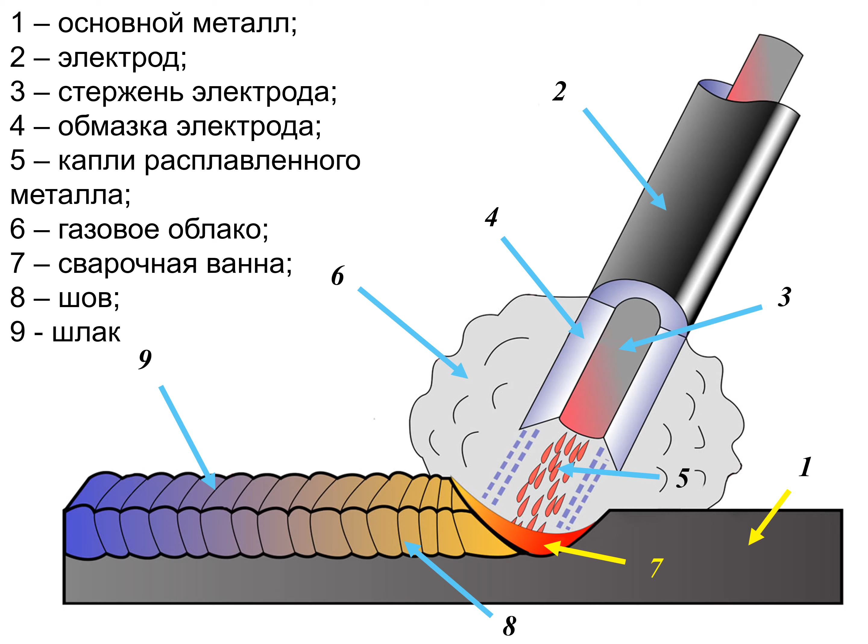What is stick welding? Stick welding is an electric arc welding process that uses rod-shaped metal electrodes covered with a flux material. The American Welding Society calls this process shielded metal arc welding, or SMAW. You may also hear it called manual metal arc welding, or MMA welding. Some people refer to it simply as arc welding, but shielded metal arc welding, or stick welding, is just one of many types of arc welding.

In stick welding, an electric current flows through a metal electrode or stick. An arc forms between the end of this electrode and the workpiece. The arc melts both the metal in the rod and the metal in the pieces to be joined. The metal from the electrode is ejected into a molten weld pool and mixes, or coalesces, with the workpiece. The metal in the workpiece is called the base metal, and the metal added to the joint from the electrode is called filler metal.

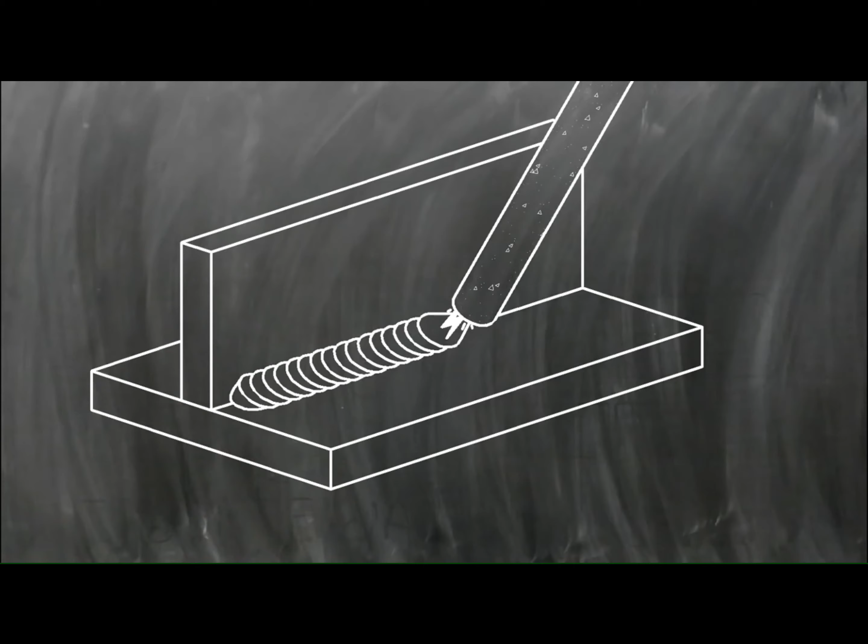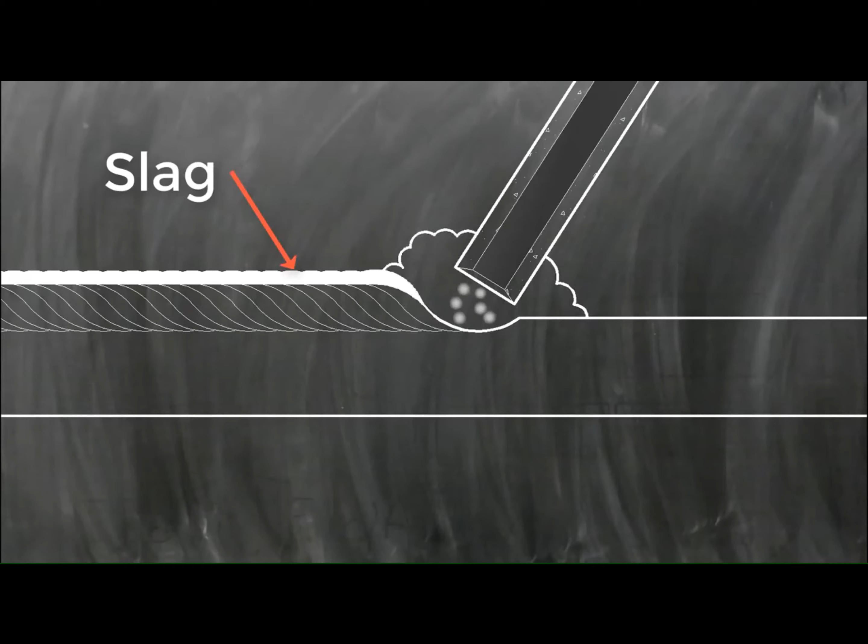Stick welding always adds filler metal to the joint. Because the electrode is constantly melting away and becoming part of the welded structure, stick welding is known as a consumable electrode process. As the electrode is heated by the arc, some of the covering releases protective gases that shield the weld and help stabilize the arc. The remaining covering melts and covers the molten weld pool with a protective slag layer. This slag layer protects and helps shape the weld as it solidifies, but it must be removed when the weld is cool.

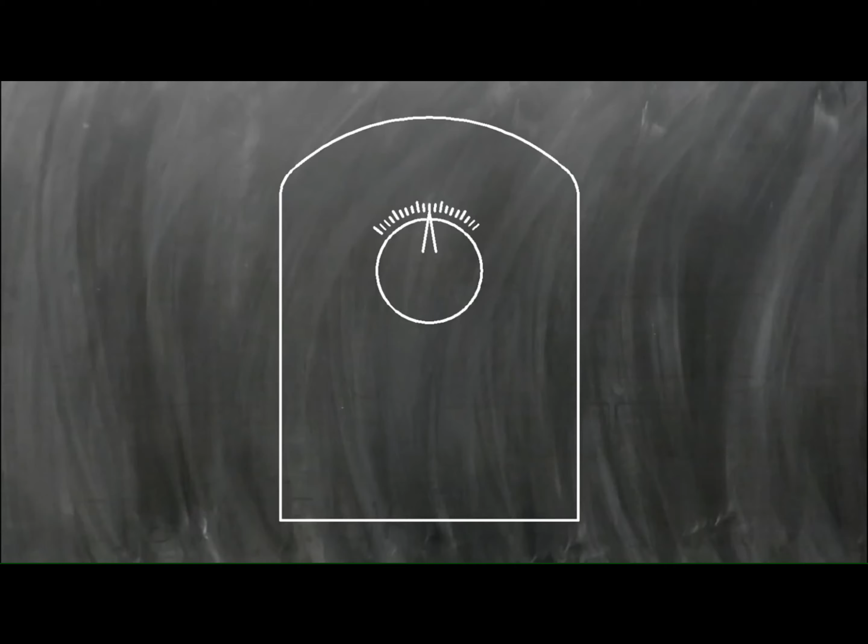Since the gases generated by the flux covering are able to completely protect the molten weld, there is no need for other shielding equipment such as high-pressure gas cylinders, regulators, or hoses. Compared to other welding processes, stick welding equipment is often very simple. Sometimes the only controls on the machine are current and polarity. Many important welding variables come from how the person doing the welding positions and moves the electrode. For this reason, the quality of welds produced by this process depends greatly on operator skill.

In stick welding, two insulated wires are connected to the welding machine. One lead goes to a clamp which is connected to the work. This is called the work lead. The other wire goes to an electrode holder. The uncovered, or grip, end of the electrode is placed into the electrode holder.

The polarity of the welding setup refers to how the electricity flows from the machine to the workpiece and back. The current will either be AC or DC. In AC, or alternating current, the direction of the flow of electricity changes directions many times every second. Direct current, or DC, is like the flow of electricity from a car battery. One lead is always positive and the other is always negative.

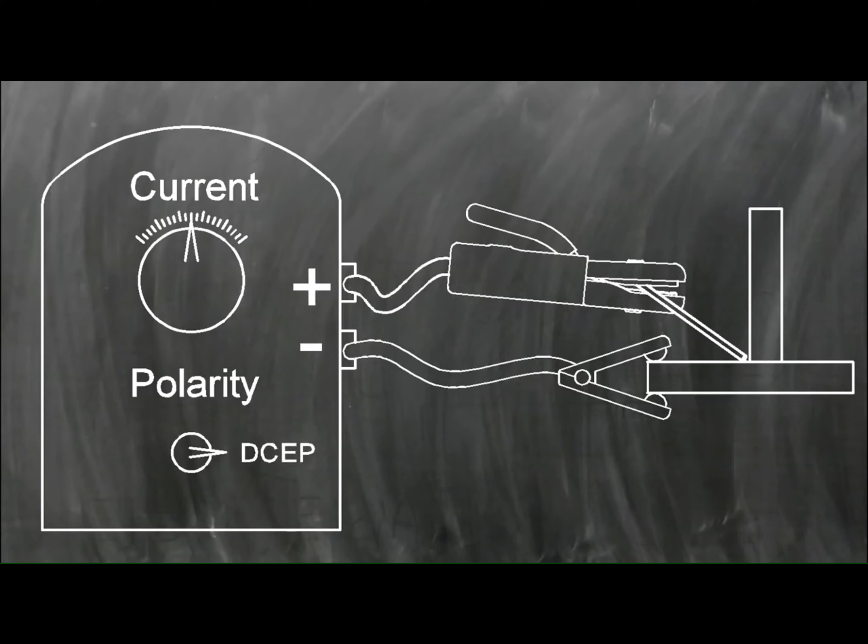DC can be set up two ways in stick welding. One way to connect DC is DCEN, or DC electrode negative, which is often called straight polarity. In DCEN, the electrode is connected to the negative terminal and the work is connected to the positive. The other way to connect DC is DCEP, which is DC electrode positive, often called reverse polarity. Many stick welding electrodes operate on DCEP, but some are designed to work with DCEN or AC, so check the manufacturer's recommendations for the proper settings.

Stick electrodes are made with a variety of metal alloy compositions and flux chemistries. You'll want to make sure the electrode you plan to use will be strong enough and that it's compatible with the base metal and the position of the joint you want to weld. Often, electrodes have the American Welding Society classification code printed on them. This code will identify tensile strength, the flux covering type, the appropriate welding positions, and sometimes other important information.

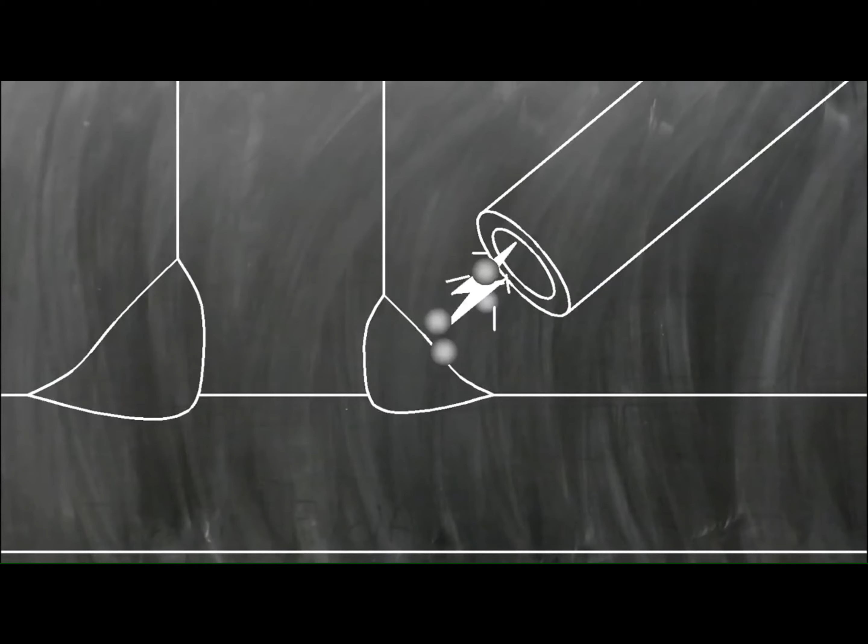So, in summary, stick welding is an electric arc welding process. It uses a consumable electrode rod that is covered with a flux material. When heated, the flux releases shielding gases that protect the weld. A layer of slag covers the weld while it solidifies and is removed when the metal cools. Stick electrodes are not all the same and must be chosen for the specific job they need to do.

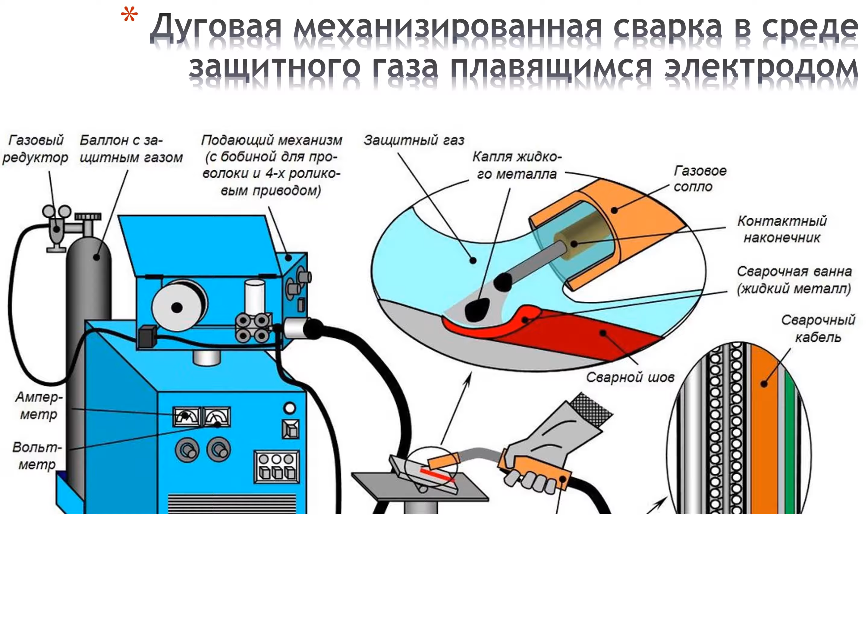What is MIG welding? MIG stands for Metal Inert Gas Welding. The American Welding Society calls this process gas metal arc welding, or GMAW. You might also hear it called wire welding. In MIG welding, a thin wire acts as the electrode. This wire is fed from a spool mounted on a gun or inside the welding machine through a flexible tube and out of the nozzle on the welding gun or torch.

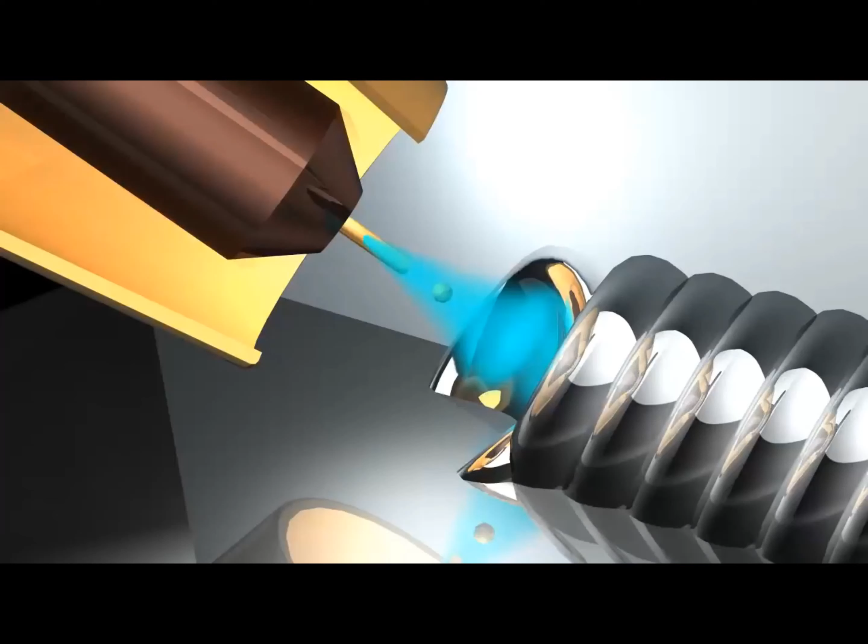The wire is fed continuously when the trigger on the welding gun is pulled. When this trigger is pulled, it also switches on the welding current and a shielding gas. An electric arc forms between this wire electrode and the workpiece and heats both metals above their melting point. These metals mix together, or coalesce, and solidify to join the workpieces into a single piece.

The metal in these parts to be joined is called the base metal, and the metal that comes from the melting wire electrode is called filler metal. MIG welding always adds filler metal to the joint. Because the wire electrode melts as it's being used, MIG is called a consumable electrode process.

Here's the MIG wire going through the wire feeder into a flexible tube or conduit liner. The liner goes through the hose or welding lead all the way to the torch nozzle. At the nozzle, the wire is fed through a contact tip and comes out at the point of the weld.

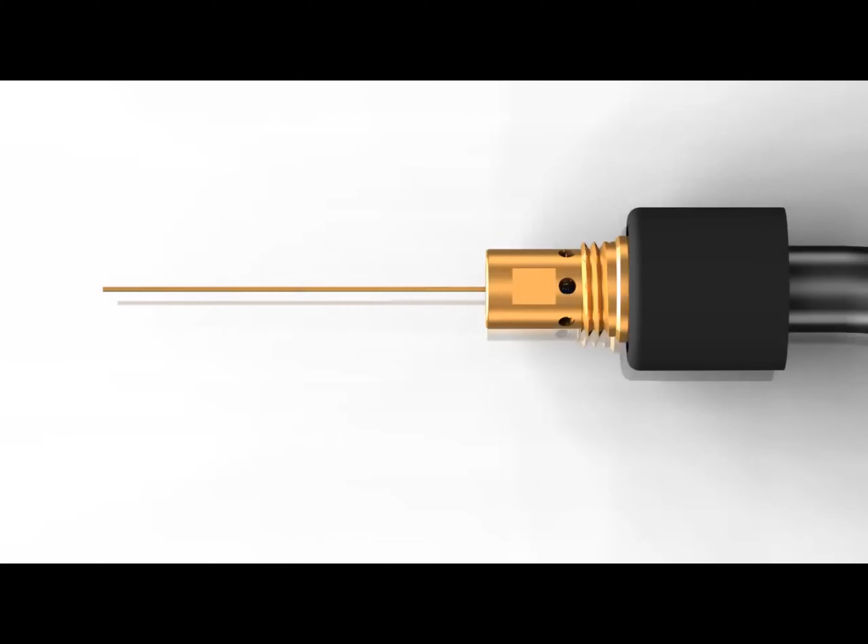Shielding gas is also fed through the welding lead. It goes through a gas diffuser and flows out of the nozzle. This shielding gas, which is often a mix of argon and CO2, protects the molten metal from reacting with oxygen, water vapor, and other things in the atmosphere.

The shielding gas is stored in high-pressure cylinders like these. The pressure is reduced to a usable level by a device called a regulator.

In MIG welding, all the machine controls are set on the machine itself. The most important of these are polarity, wire speed, and voltage. The trigger on the gun is just an on-off switch.

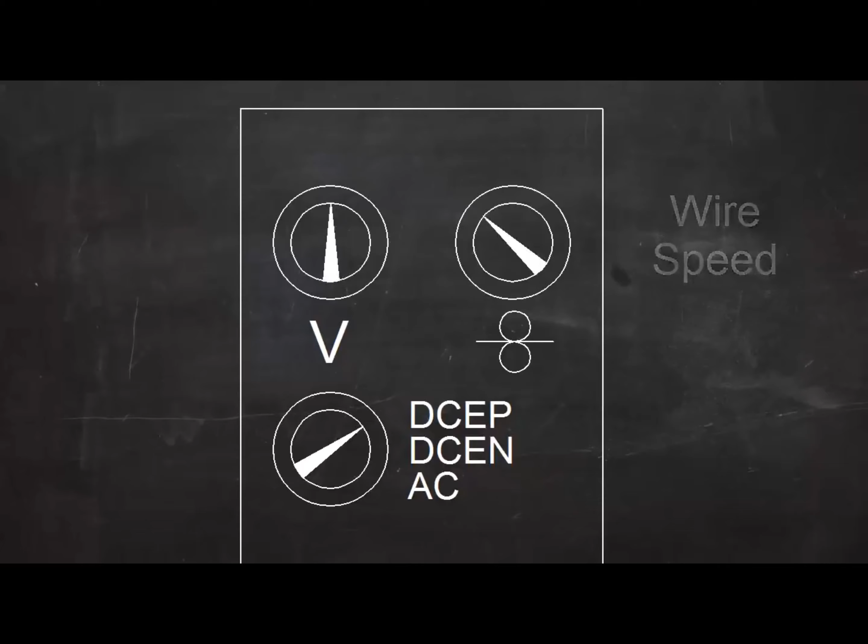For most MIG welding, the current is direct current, or DC. DC is like the current flowing from a car battery. One wire is always negative, and one is always positive. In DC MIG welding, the electrode is usually positive and the workpiece is negative. The term DCEP is used, indicating that the current is direct current and the electrode is positive. This is also called reverse polarity, but DCEP is a more descriptive term.

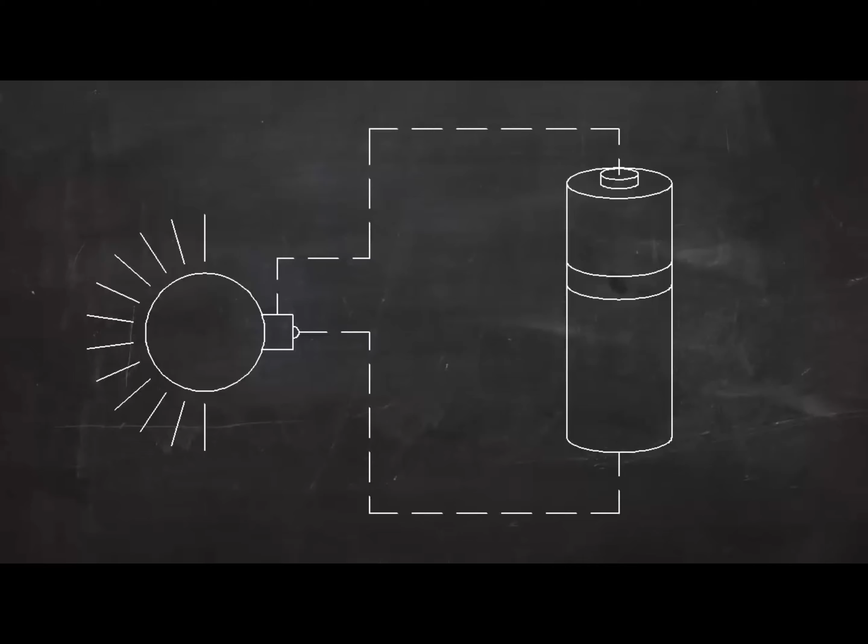In an electric circuit, the current flows in a loop. In MIG welding, the current has to flow in a complete circle from the machine to the torch, into the work, and back to the machine. A work lead is clamped to the work to complete the circuit from the workpiece back to the machine.

So, in summary, MIG welding is an electric arc welding process. It uses a consumable wire electrode. Filler metal is added automatically, and the shielding gas comes from a high-pressure cylinder.

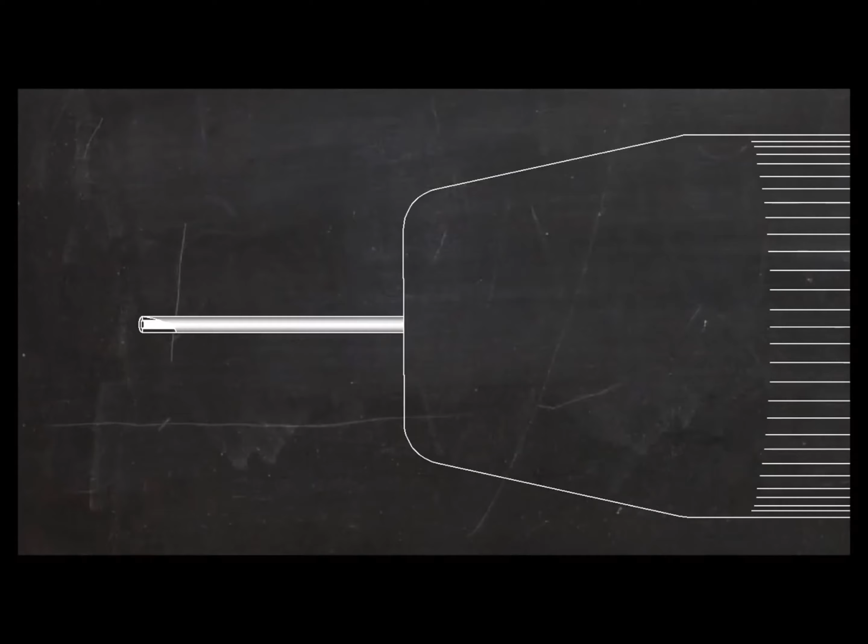What is flux core welding? Flux core is an arc welding process that uses a tubular wire electrode with a flux-filled inner core. The American Welding Society calls this process flux cored arc welding, or FCAW.

All flux core welding is done on equipment that is similar to, and sometimes identical to, the equipment used in MIG, or gas metal arc welding. If you're not familiar with MIG welding, you might want to watch our What is MIG Welding video before continuing. But you should understand that flux core welding has some important differences from MIG welding.

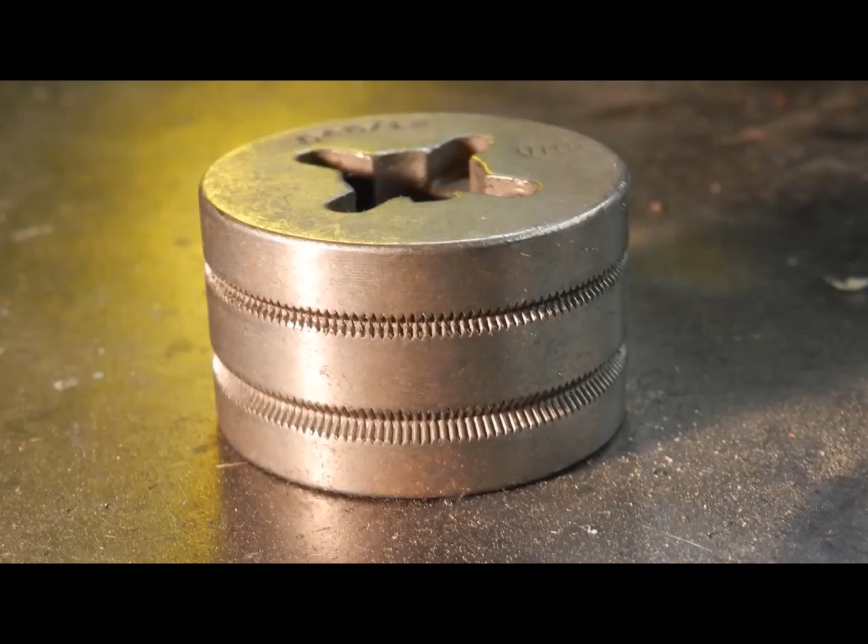In flux core welding, the wire electrode is fed through a wire feed unit. Usually, this wire feeder requires knurled rollers that can grip the tubular wire without flattening or damaging it.

As in MIG welding, an electric arc forms between this wire electrode and the workpiece. This arc heats both metals above their melting point. These metals mix together, or coalesce, and solidify to join the workpieces into a single piece.

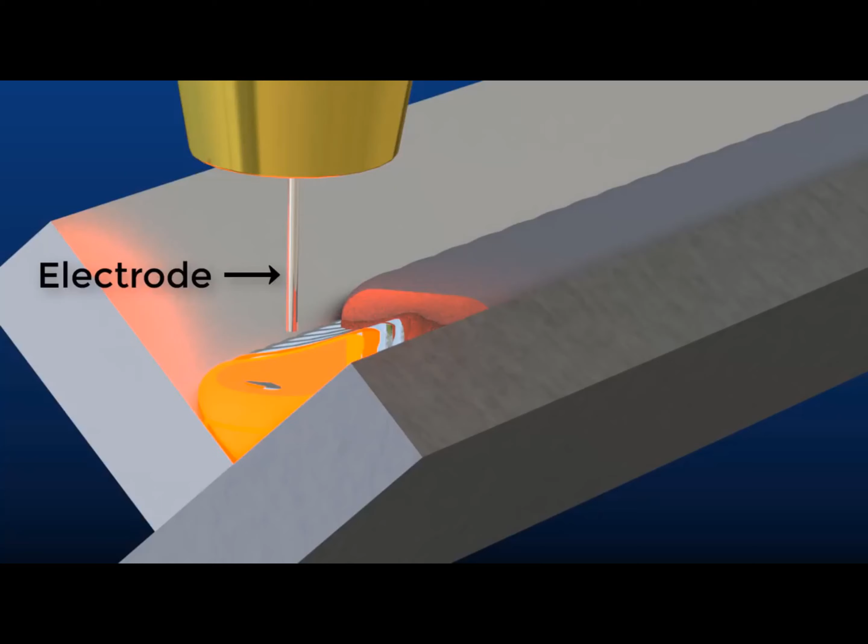The metal in the parts to be joined is called the base metal, and the metal that comes from the melting wire electrode is called filler metal. Because the wire electrode melts as it's being used, flux core is called a consumable electrode process. Flux core welding always adds filler metal to the joint.

The job of the flux inside the electrode depends on which type of flux core process it was designed for. There are two main types of flux core arc welding: self-shielded, known as FCAW-S, and gas-shielded, known as FCAW-G. You need to be sure you're using the wire in the way that it was designed to be used, because the chemistry behind these two processes is different.

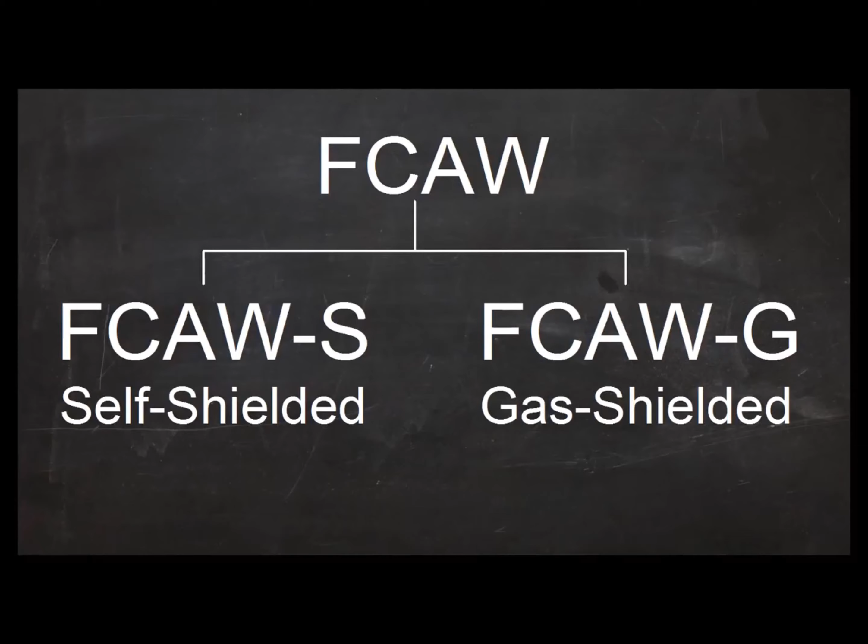Flux-cored electrodes that are designed to be self-shielded contain a flux that completely protects the molten weld pool. The flux in these electrodes creates a protective cloud that prevents gases like nitrogen and oxygen from reacting with the hot metal. One advantage of the self-shielded flux-core process is that the added cost and inconvenience of gas shielding equipment is eliminated. Also, self-shielded electrodes are less sensitive to drafts and breezes that easily contaminate gas-shielded processes like MIG welding. This can be a real advantage in some applications.

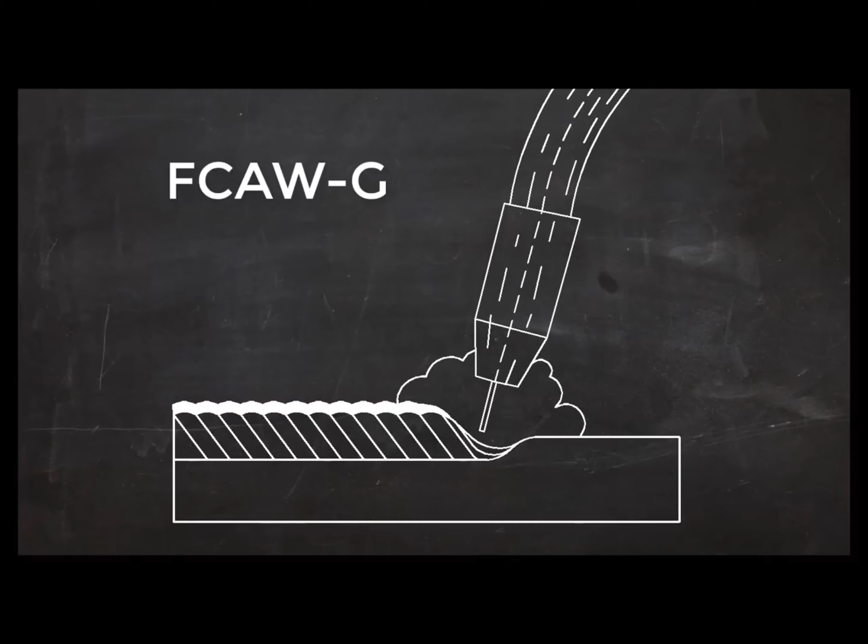Electrodes designed to be gas-shielded rely on a secondary shielding gas to do the job of protecting the molten weld. The high-pressure gas cylinders used for this process are of the same design as those used in MIG or TIG welding. These cylinders contain gas under extremely high pressure, and a device called a regulator brings the gas to a usable pressure. One of the most common gases used to shield flux core is pure CO2.

Other gases, such as CO2 argon blends, are also used. But one advantage of flux core G is that low-cost CO2 can be used to shield the weld. Another benefit of gas-shielded flux core is the high deposition rate that can be achieved with the combination of flux and gas. Gas-shielded flux core has the ability to lay down metal at an extremely fast rate.

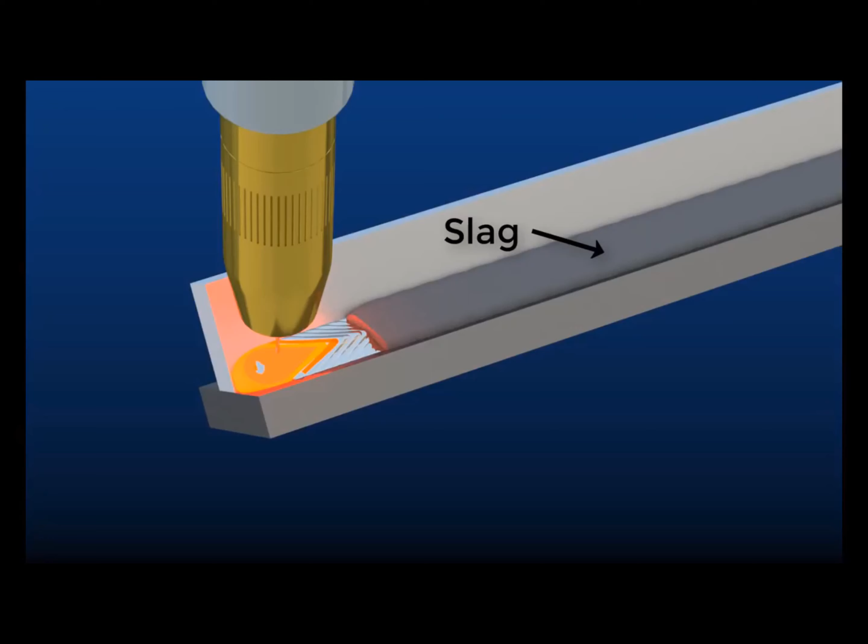In both the self-shielded and gas-shielded processes, the flux forms a thin layer of slag that protects the weld as it cools. This slag also helps the solidifying weld to take a consistent low-profile shape. In flux core welding, all of the machine controls are set on the machine itself.

The most important of these are polarity, wire speed, and voltage. The trigger on the gun is just an on-off switch.

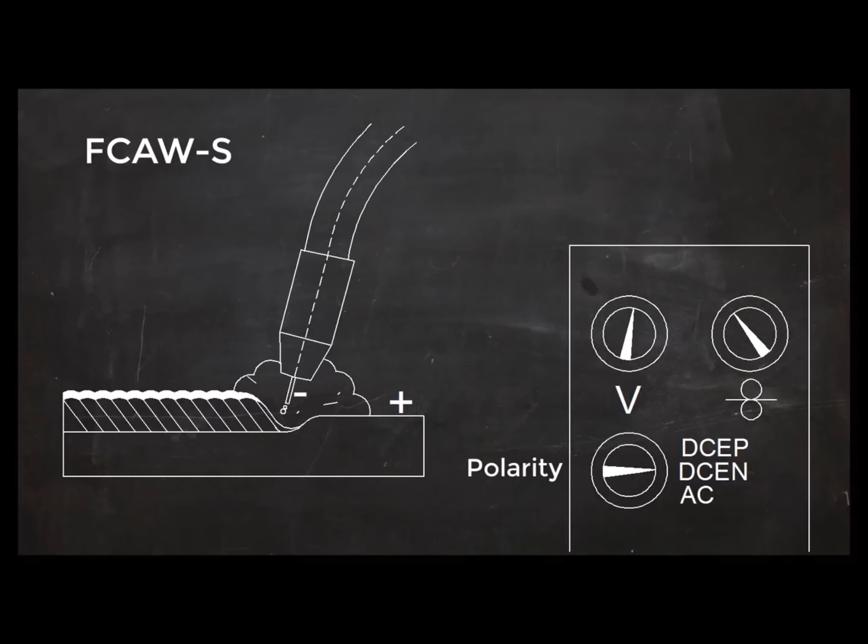For most flux core welding, the current is direct current, or DC. DC is like the current flowing from a car battery. One wire is always negative and one is always positive. In self-shielded flux core welding, the electrode is usually negative and the workpiece is positive. The term DCEN is used for this, indicating that the current is DC and the electrode is negative. You might also hear this called straight polarity.

In gas-shielded flux core welding, the electrode is usually positive and the workpiece negative. The term for this is DCEP, indicating that the current is DC and the electrode is positive. This is also called reverse polarity, but DCEP is a more descriptive term. Keep in mind that these are the most common settings, and always check your manufacturer's recommendations.

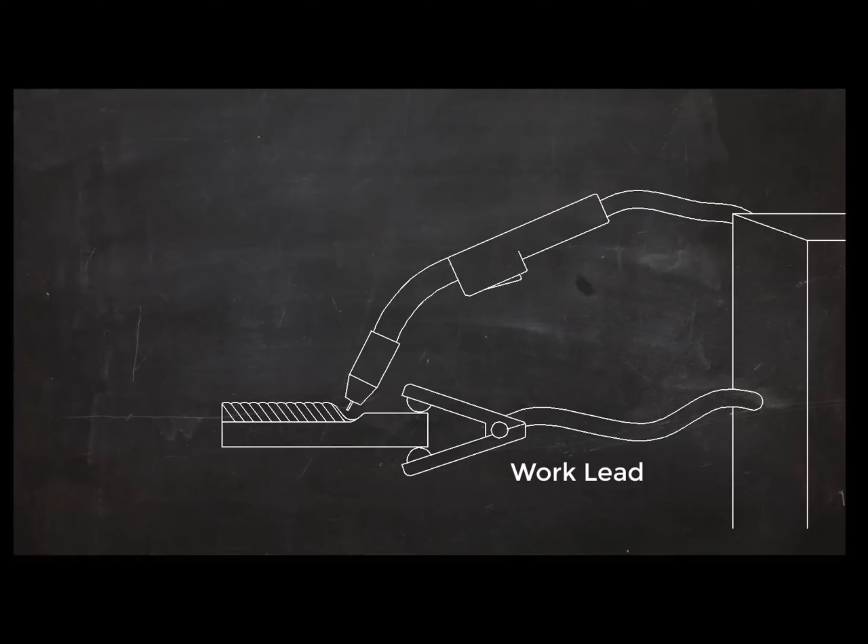In an electric circuit, the current flows in a loop. In flux core welding, the current has to flow in a complete circle from the machine to the gun, into the work and back to the machine. A work lead is clamped to the work to complete the circuit from the workpiece back to the machine.

So in summary, flux core is an electric arc welding process. It uses a consumable tubular wire electrode that contains flux material on the inside of it. Filler material is added to the weld automatically as the wire electrode melts. In self-shielded flux core, the weld is protected by the flux itself. And in gas-shielded flux core, the shielding gas comes from a high-pressure cylinder.

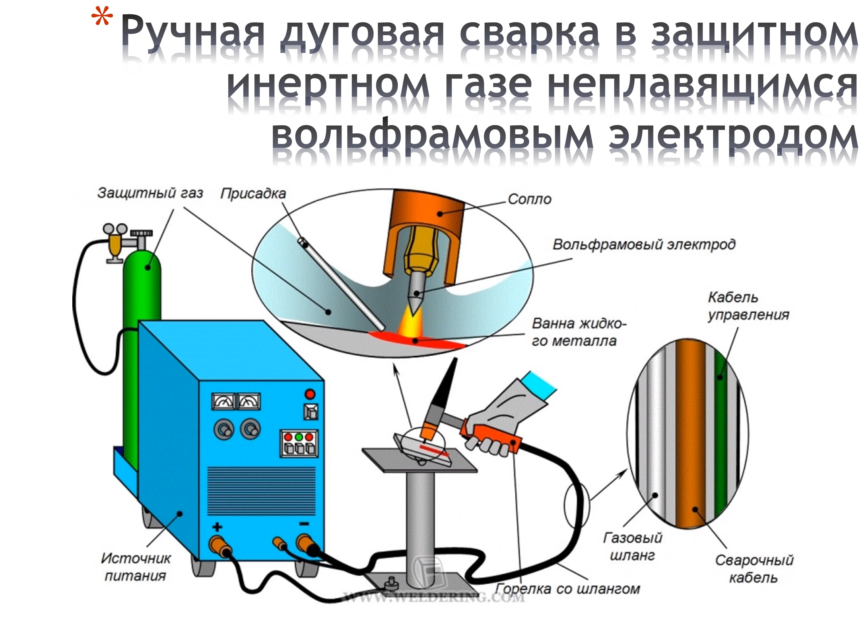What is TIG welding? TIG stands for Tungsten Inert Gas Welding. The American Welding Society calls this process gas tungsten arc welding, or GTAW. You might also hear it called heli-arc welding.

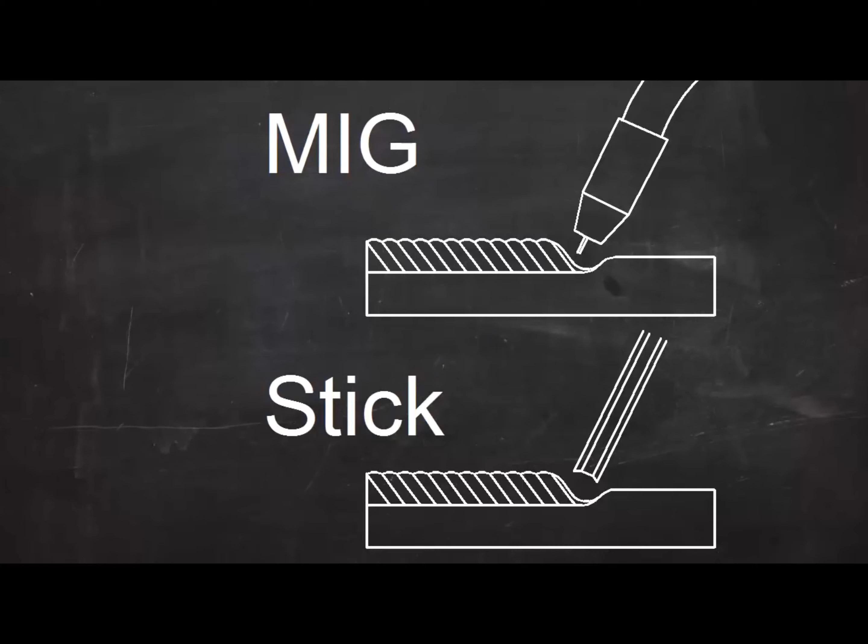TIG welding uses a tungsten electrode, and tungsten has an extremely high melting point. When you TIG weld, the electrode gets hot, but it doesn't melt. We say that it's a non-consumable electrode. That doesn't mean it lasts forever. It just means that it doesn't melt and become part of the weld. In a lot of other welding processes, the electrode melts and becomes filler metal. Those are consumable electrode processes.

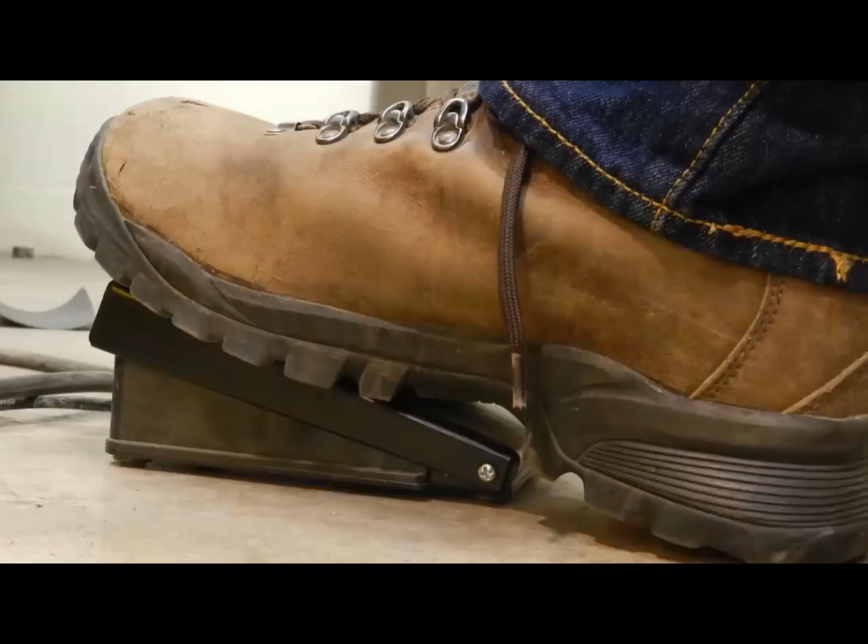TIG works by melting the base metal, and that is the metal that makes up the two pieces that are to be joined. The heat is generated by an electric arc that forms between the base metal and the tungsten electrode. You can control the amount of heat with a foot pedal or with a thumb wheel on the torch.

For most metals, the current is direct current, or DC. DC is like the current flowing from a car battery. One wire is always the negative and one is always the positive. In DC TIG welding, the electrode is usually negative and the workpiece is positive. The term DCEN is used for this, indicating that the current is DC and the electrode is negative. This is also called straight polarity, but DCEN is a more descriptive term.

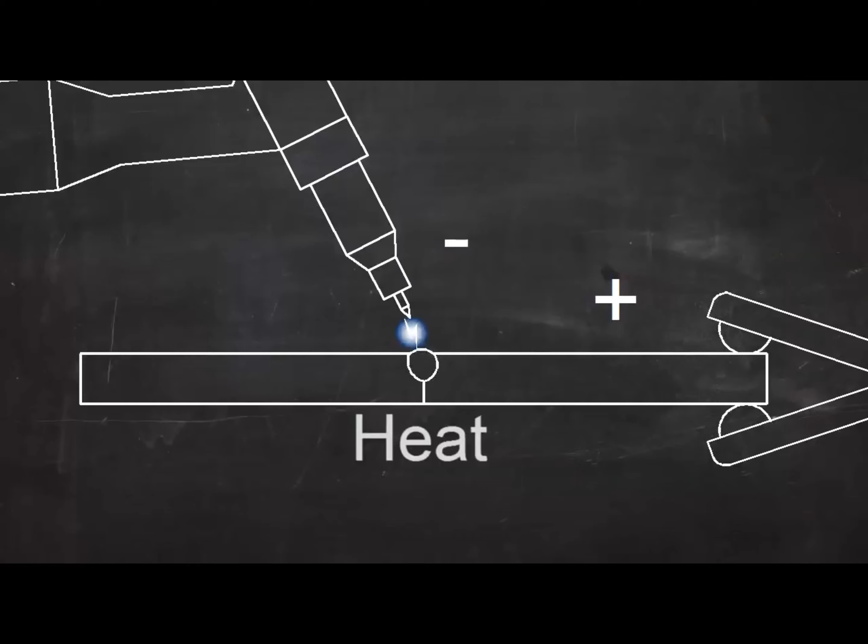DCEN puts most of the heat on the workpiece, and it's the most common setup. When welding aluminum, however, AC is used. In AC, the positive and negative voltages switch back and forth between the electrode and the workpiece. This puts more heat on the electrode, but it has a cleaning effect on the workpiece. Aluminum forms oxides that float to the top of the weld pool and prevent a good weld. AC current helps control these oxides.

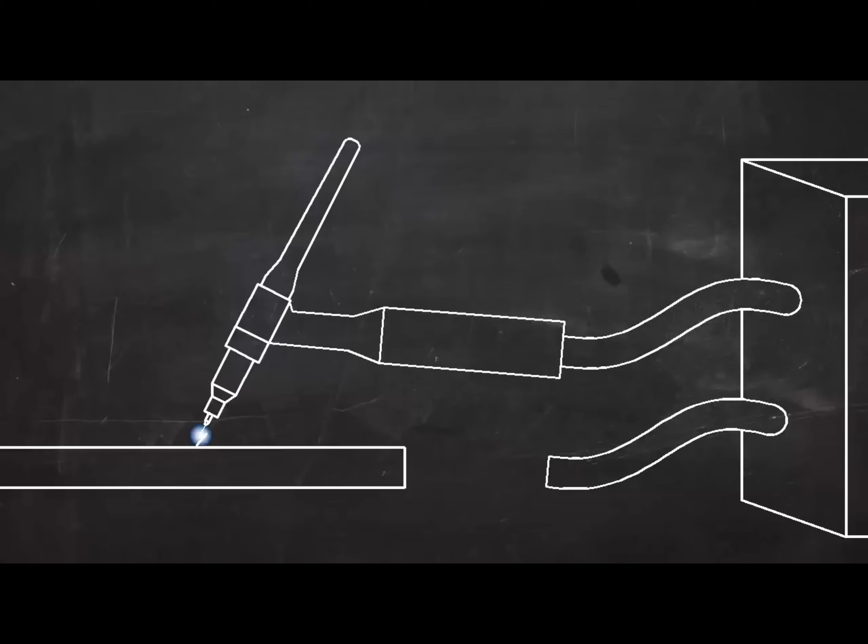In an electric circuit, the current flows in a loop. In TIG welding, the current has to flow in a complete circle from the machine to the torch, into the work, and back to the machine. A work lead is clamped to the work to complete the circuit from the workpiece back to the machine.

You can TIG weld with or without filler metal, and that's not a choice you have in a lot of other processes. If you want to add filler metal to a TIG weld, use a filler rod, which is just a rod of metal with a specific alloy. You want to make sure that the filler metal you're using is compatible with the base metal and that it has the strength required to do the job.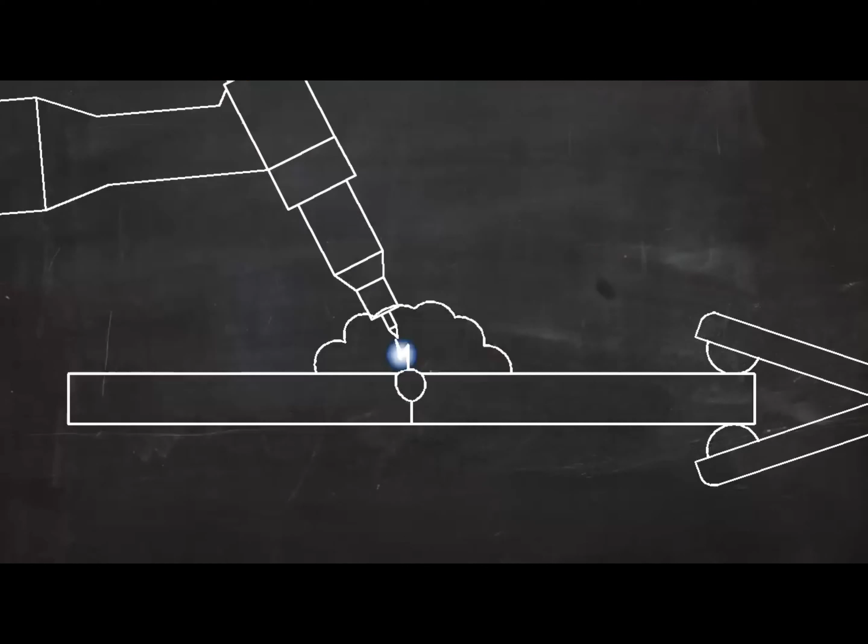In TIG welding, the molten metal is protected by a shielding gas. This gas, usually argon and sometimes helium or other gases, keeps the molten metal from reacting with oxygen and water vapor in the atmosphere. This shielding gas is stored in high-pressure cylinders like these. The pressure is reduced to a usable level by a device called a regulator. The shielding gas flows through a hose and comes out right at the point of the weld.

So in summary, TIG welding is an electric arc welding process, uses a non-consumable tungsten electrode, the filler metal is added separately in the form of filler rod, and the shielding gas comes from a high-pressure cylinder.